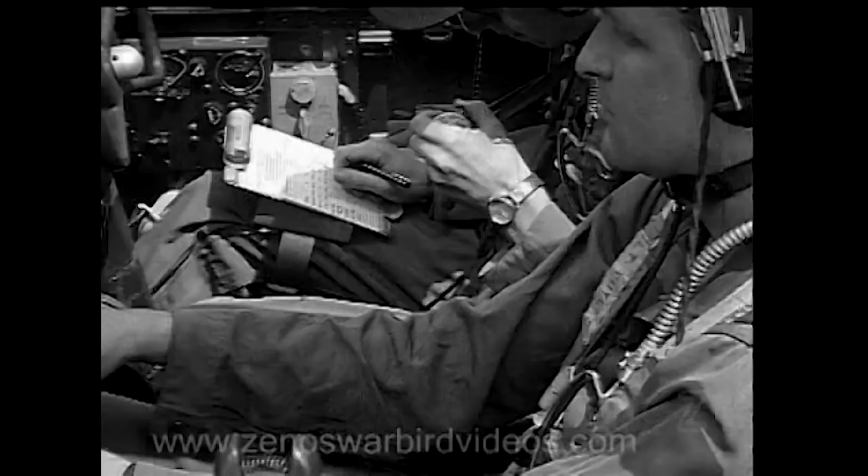In larger aircraft, someone who can help him find the answers will fly along with him. He may be a pilot, returned from several hundred hours in combat, or he may be a flight test engineer who requires the test pilot's cooperation and judgment. In developing aids to flying, no one has brought forth a pilot with an extra pair of hands, which accounts for the need of a second man during a complicated test procedure.

Flight testing means thoroughness, more often thoroughness at its dullest, thoroughness that takes hours of precision flying. The many dull hours spent in sweating out tests are partly compensated for by the variety of tests and the many types of airplanes to be flown.

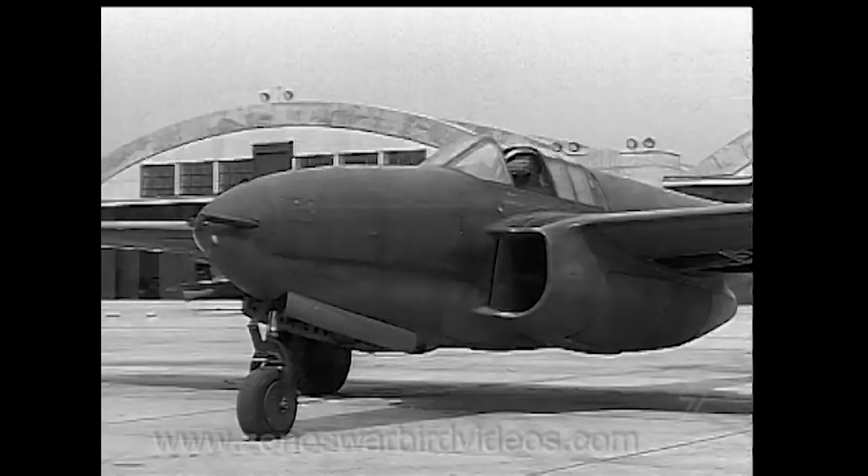Down in this southwest corner of Ohio is located without a doubt the most unusual air center in the world, Wright Field. Here he will find the widest and oddest assortment of aircraft ever assembled on one airfield. A pilot's flying time in one or two types of aircraft is of little consequence here, for he becomes a real asset to the flight test section only after he has become familiar with all types.

The judgment of a top-ranking test pilot often becomes the basis for important decisions in development, modification, and production. Many top names in the industry today were associated with earlier flight tests that helped make America the world's top-ranking air power.

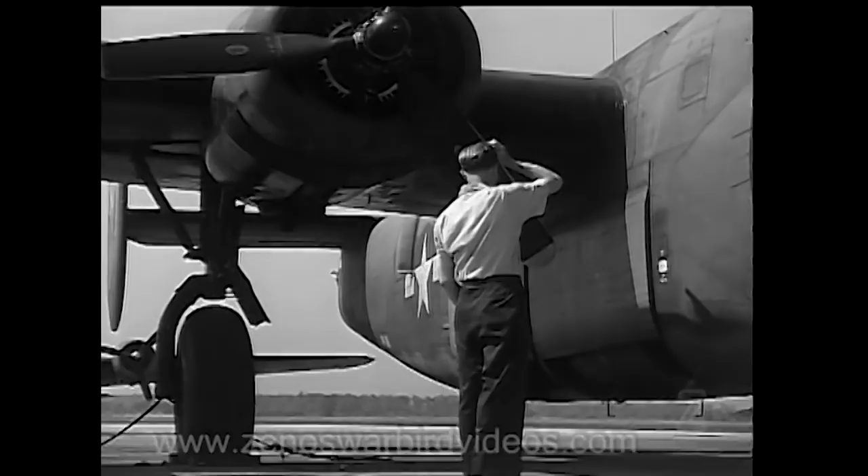The flight testing of modified aircraft, too, ranging from the odd combination of a B-17 nose applied to a B-24, to a lopsided cockpit added to a P-38, is all in a day's work for the flight test pilot. Whether it's the largest of bombers or the smallest of experimental fighters, each airplane must be flight tested, all of which emphasizes the important role the flight test pilot plays in the development and acceptance of aircraft and equipment by the Air Forces.

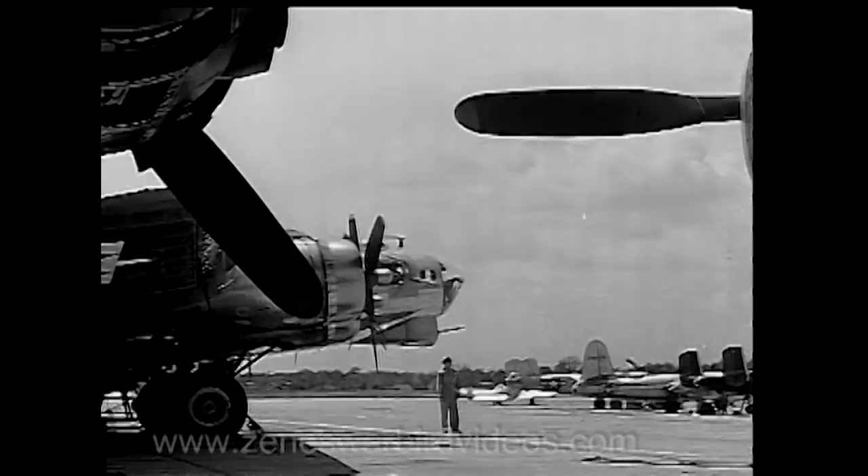Such an enviable rating may seem a remote possibility to a lieutenant fresh out of flying school and about to take off on a flight test training course. To illustrate the various steps he must take, this chart outlines his progress from the start.

His initial classification will normally be that of functional pilot. Assigned to the less involved tests, he will become acquainted with many types of airplanes, developments, and modifications. If he can stick this out, he will advance to the training bracket. The limited flight test grade widens his experience in many types of airplanes, during which he will learn how to sweat out his tests.

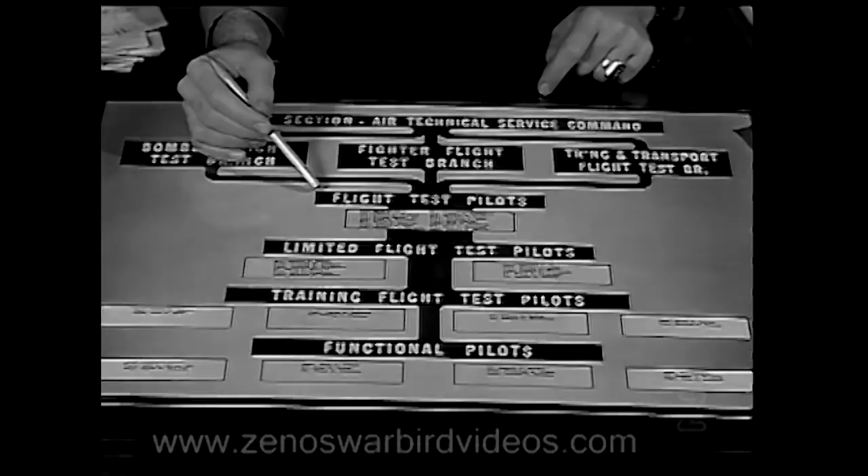His chances are somewhat less, of course, in becoming one of this group of test pilots, whose judgments and decisions are so important in any one or all of the branches, bomber, fighter, or training and transport, under the flight section of Air Technical Service Command.

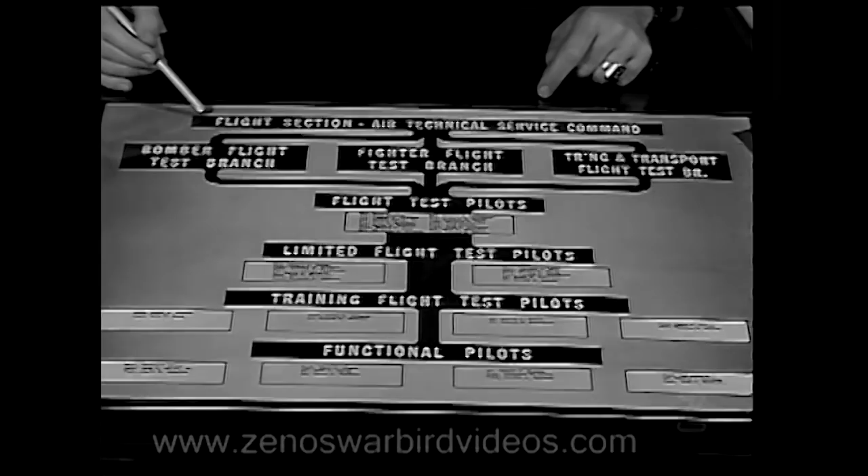Much of the flight testing is conducted upon recommendation from theaters of operations. Tests that have to do with modifications or development are requested by Air Technical Service Command Headquarters. However, the majority of tests are requested by production engineering, the technical staff of Engineering Division, and the many Wright Field laboratories.

Aside from performance or flight tests, there are many incidental tests. For instance, any factory or laboratory data on piston rings, after having been run in on a block test, cannot include the variables that will show up under flying conditions.

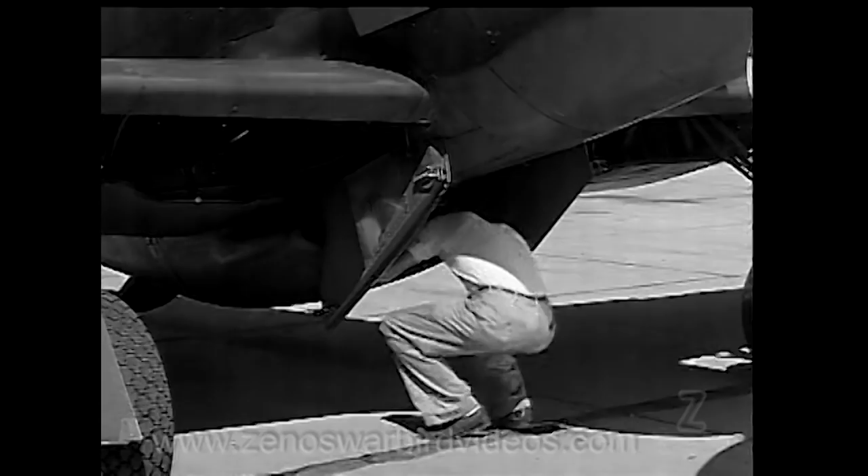The result of high temperature or wear from sand and dust do show up when flight tests are made here or at some desert air base. And again, when the size of an oil radiator is found to cause considerable drag, hot oil tests are conducted. These will determine if the size of the radiator can be reduced to increase airspeed without causing engine failure or reducing engine efficiency. Developments on landing gears require landing and taxi tests to find out their effectiveness in snow, sand, and mud.

Such tests are usually jobs for the unseasoned pilot. But when he has shown that he can take long hours, seven days a week, and an intense interest in his assignments, he will be advanced according to his abilities. When considered competent, he will then be assigned to an aircraft to get performance data.

Prior to all tests, a flight test engineer contacts the source of the request personally and determines in detail the specific information desired. It is he who checks the assignment of the airplane to be flown and sees to it that it is properly loaded and equipped for the test.

Now our flight test pilot comes into the picture. He and the engineer become a Ways and Means Committee to determine the best procedure for the test. Of these ways and means, the type and weight of the airplane is considered, the fuel capacity, type of instrumentation, and the pilot's endurance. Several data cards will be needed, one for each test.

On each card is outlined the flight test procedure for that particular kind of flight test. Records of each test are to be entered by the flight test pilot on his data card clipped to a holder on his knee. The use of a stopwatch computes his timing.

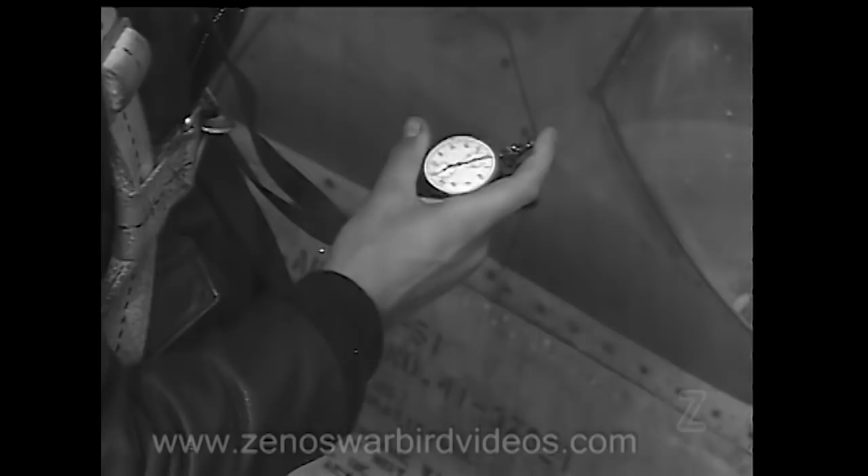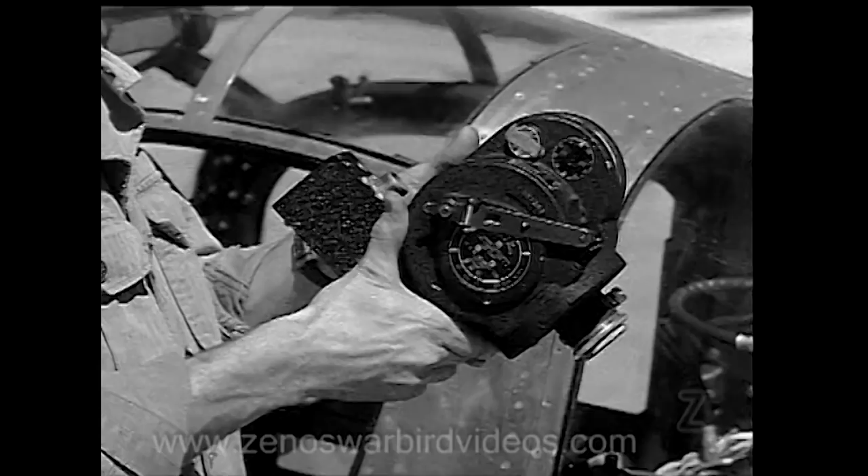Then, to obviate the chance of human error during some tests, two devices automatically record other desired readings. The barograph, which from takeoff to landing traces a record on its blackened paper cylinder, and a fixed movie camera driven by a spring motor. This is focused on an auxiliary instrument panel and will photograph steadily or intermittently the readings of the instruments during the test period. The test records of these two devices are used singly or compared with each other and the pilot's data card.

Since the answers to all tests are based on a correct airspeed calibration and altimeter check, this becomes the first of all tests. Having obtained from the flight test laboratory a barograph, stopwatch, and camera if a photographic record is to be made, the procedure is now up to the pilot, providing the weather conditions are favorable.

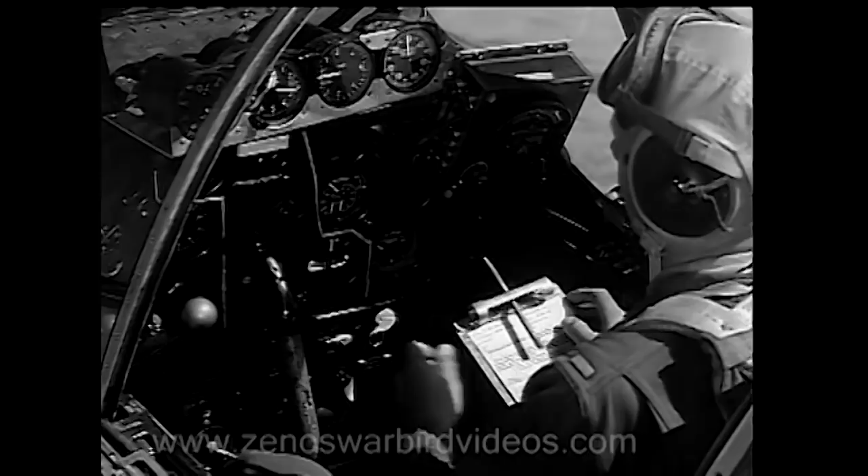In this case, low wind and smooth air at low altitude, since several runs are to be made over a speed course. Before takeoff, the altimeter is set at 29.92. The altimeter reading and free air temperature are then noted on the data card.

When the speed course is reached, it is traversed at the approved low altitude and slow speed. This is done in order to make another check on the altimeter and temperature in this locality. Remember, these readings are always taken before takeoff, before and after the actual calibration, and again after landing back at Wright Field, because it is these figures that enable the flight test engineer to compute the airspeed installation error.

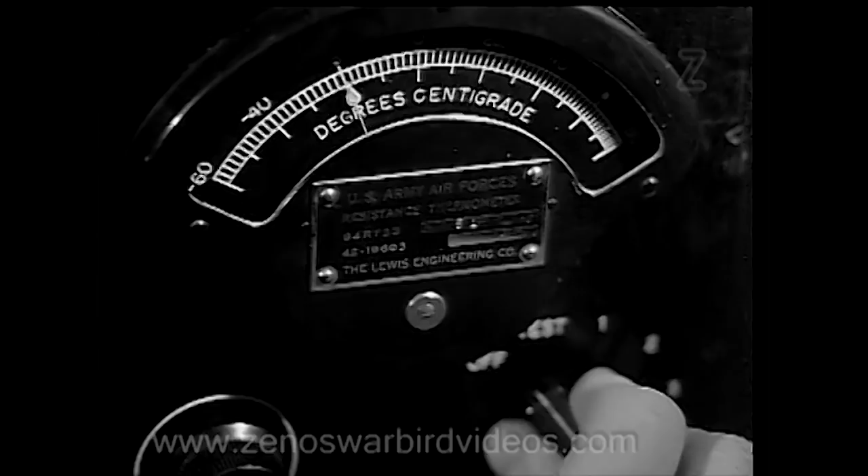The effect of a crosswind must now be considered. An effective run can only be made by disregarding drift and flying the airplane on the compass heading of the speed course. Now for the first half of the first calibration run.

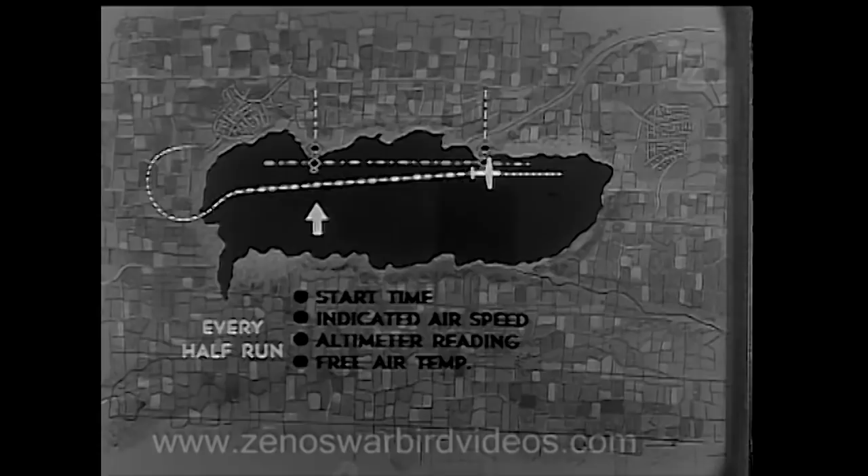Having gone back far enough to attain maximum speed well before reaching the marked course, the stopwatch is started opposite the first set of markers. The indicated airspeed, the altimeter, and free air temperature are noted, and the watch stopped in passing the last markers. All this information is now entered on the data card.

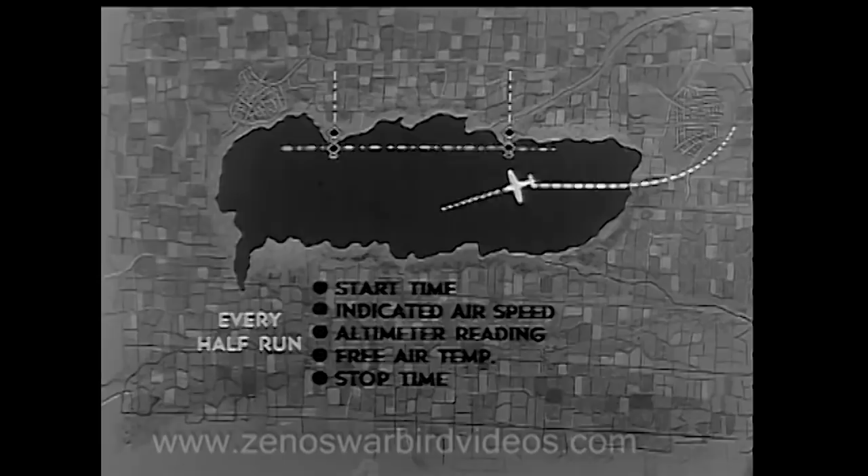Returning for the last half of this first run at the same speed, the same procedure of clocking, reading, and entering is repeated. Other complete runs at lower speeds are made and the recording procedure repeated, not overlooking that final altimeter and temperature check at the speed course, and again before you step down from your airplane on the ramp at Wright Field. Remembering that you've been out for an hour and a quarter, there's probably a change in both barometric pressure and temperature. Obviously, there has been a change, and now the flight test engineer can compute to his heart's content.

An alternative procedure in obtaining airspeed calibration is frequently used in which another airplane is employed instead of a speed course. This additional aircraft is kept up to accurate calibration and functions as a pacer airplane during the test. The various check intervals are signaled visually from one pilot to the other.

In this procedure, the altimeter checks at various speeds are made by buzzing the tower both before and after the test. This is not the fun it seems to be. It's a job of precision flying.

Then someday, when the weather is just right, you'll be running a critical altitude flight test. In other words, finding the highest altitude at which rated power can be obtained on this airplane and recording the necessary data.

You will recall your session with the flight test engineer when together you decided that for this test you would make 5 level flight runs at altitudes that would produce the needed data. Functional settings during the run must include the prop at 3,000, mixture auto-rich, throttle wide open, flaps completely closed, and landing gear up, not overlooking the necessity of setting your altimeter at 2992 before takeoff.

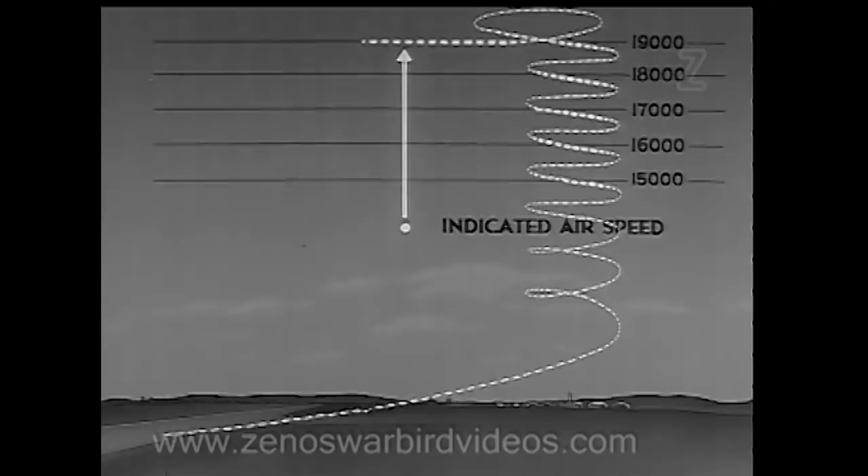That precise condition will not be arrived at, however, until you've learned the meaning of sweating it out. That's what you came up here for, to hold her until you could get accurate readings for the flight test engineer: indicated airspeed, manifold pressure, carburetor air temp, oil temp, and cylinder head or coolant temp.

With these few little details entered on the data card, you can drop down to 18,000 and do it all over again. Then down to the other levels specified on your data card, at each level repeating the same procedure of reading and entering.

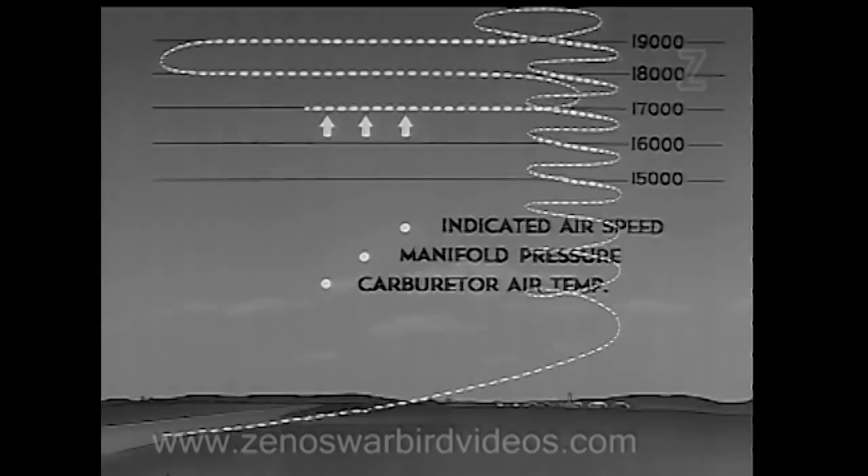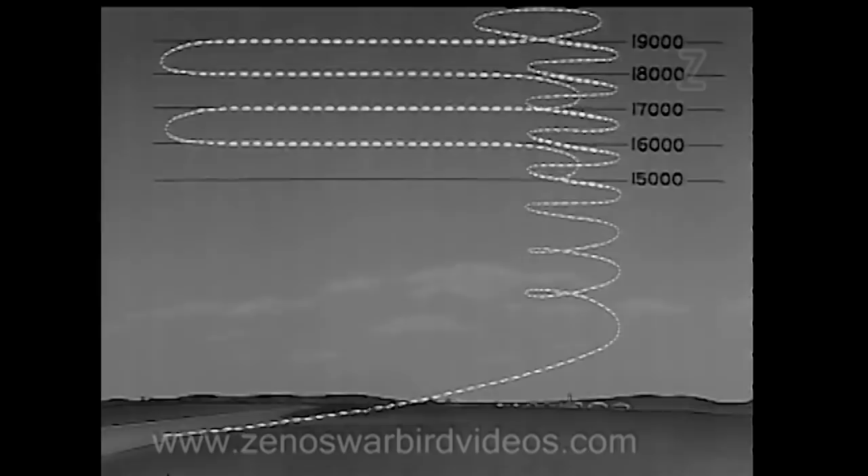Maybe not quite as fast as the action of this graph, for the actual test flight takes about an hour and a half of precision flying.

With this test completed, maybe you can call it a day if your data card is complete with the date, time of test, and your somewhat shaky signature.

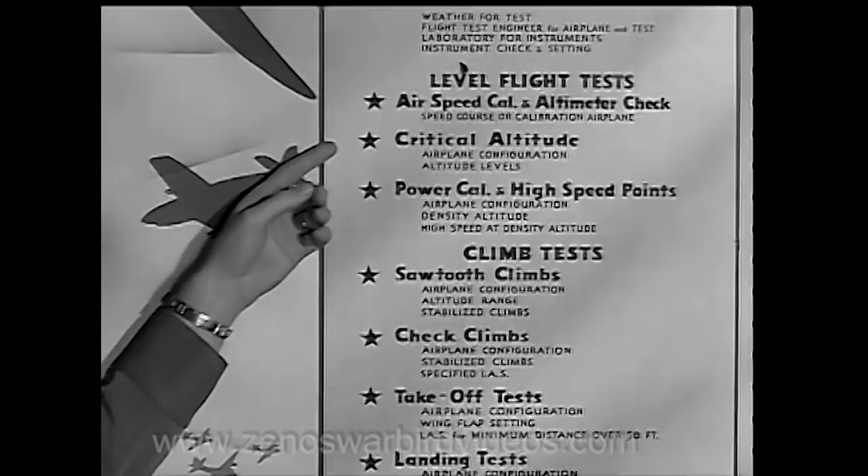After the flight test engineer has computed your data to determine the critical altitude, we come to the test for power calibration and high speed points, or to find the best airspeed for various engine settings.

Since the desired altitude is unknown and varies from day to day, a density altitude table is used to find the altitude at which this test is to be run. Again, the altimeter is set before takeoff, 2992.

Then a search for the altitude where your air temp and altimeter readings agree with the matching combination shown on the density altitude table. When this altitude is found, again as in the previous test, the prop setting must be at 3,000, mixture auto-rich, throttle wide, cowl flaps closed, wing flaps and landing gear up, and the run proceeds exactly as in the critical altitude test.

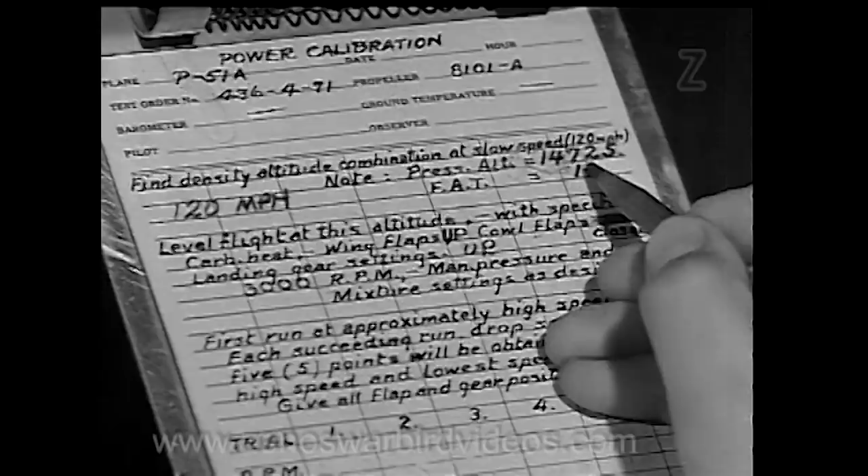A short pull-up identifies the end of each run on the barograph record. The second run is made with procedure unchanged, except that the throttle is pulled back to a point that will reduce the manifold pressure 2 inches.

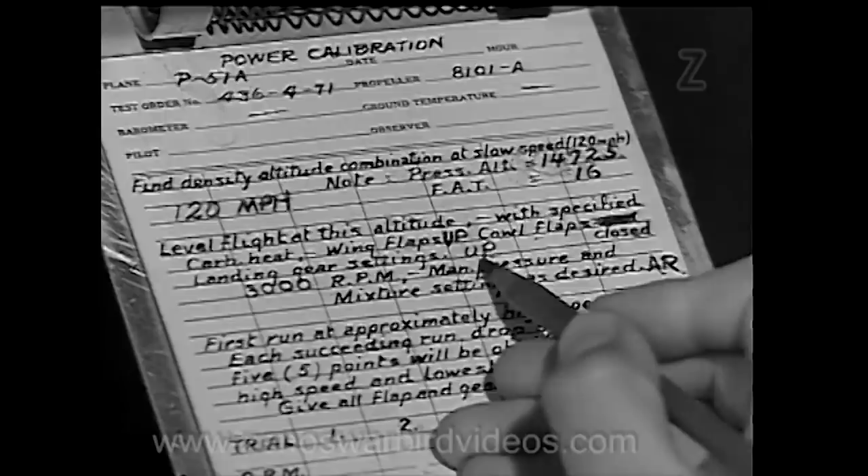For each succeeding run, the throttle is pulled back for an additional 2-inch reduction of the manifold pressure, and entries are made of these important readings on the data card. All runs completed, we now have the necessary high speed points in relation to manifold pressures.

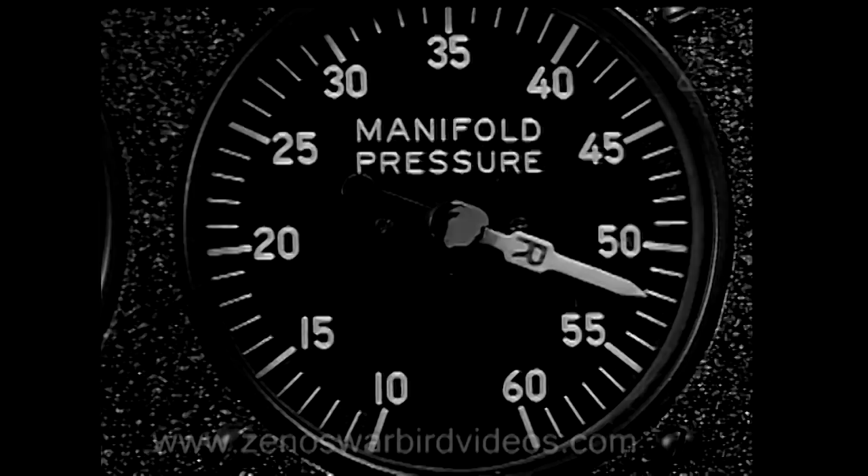This data is then reduced by the flight test engineer to a curve, representing the variation of speed with power at the critical altitude. Consequently, with the rated power of the engine at critical altitude, the curve shows us the maximum speed of the airplane.

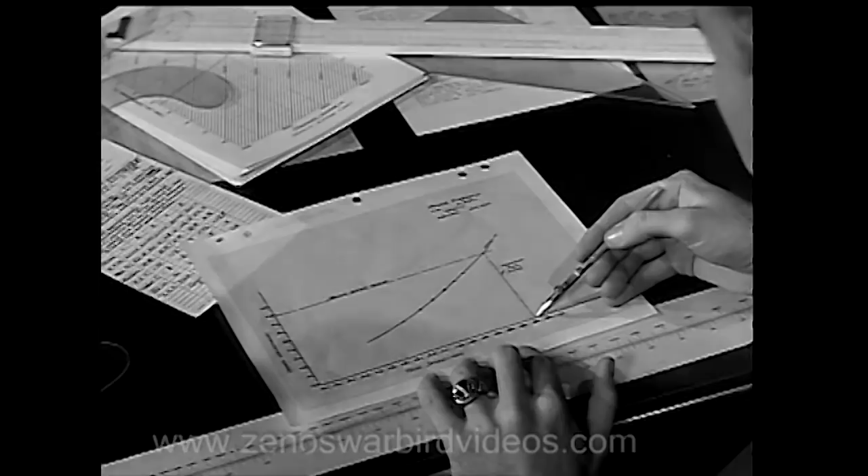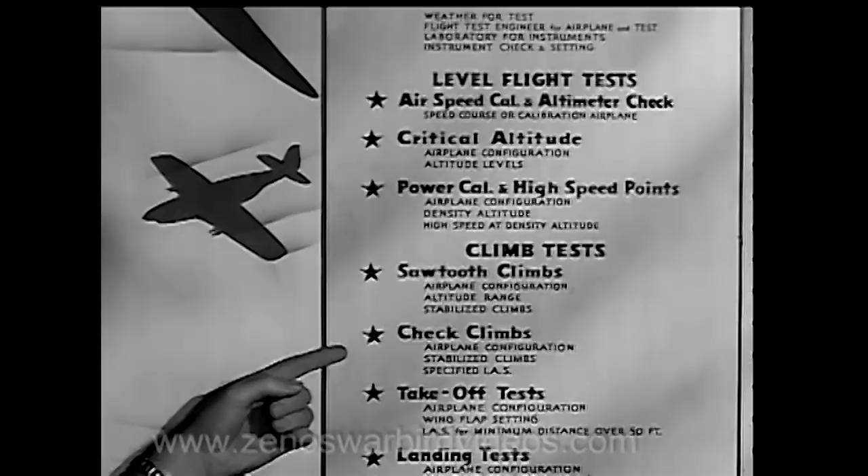Now that we have covered the test procedures for all level flight performance, here are the tests to ascertain the most efficient climbing speeds and the best rate of climb.

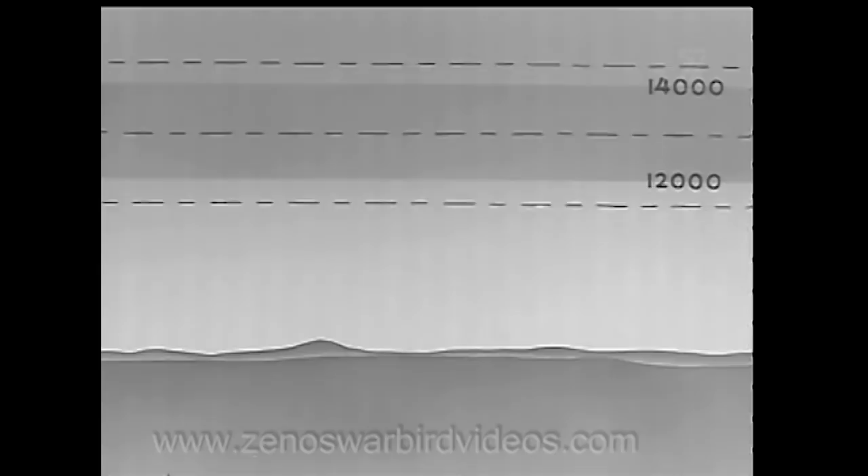In order to determine the indicated airspeed for maximum rate of climb, a series of short climbs are made through an altitude range agreed upon by you and the flight test engineer.

In this test, the barograph for the first time becomes a primary instrument. The stopwatch is again used. And as in all test procedures, the altimeter setting is important. Again, a check is made as before, from prop setting to landing gear.

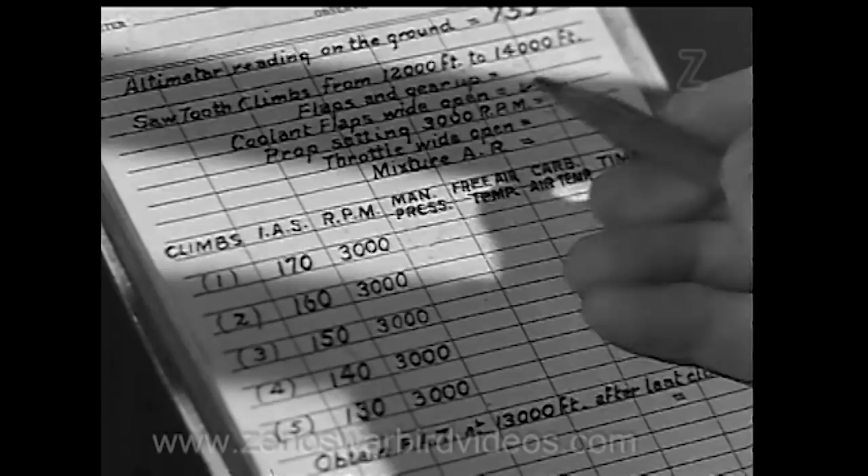In this test, the coolant flaps and oil shutters are set wide open. Care must be taken in flying this test to make certain the airplane is in a steady climb at the indicated airspeed specified on the data card before the desired lower altitude is reached.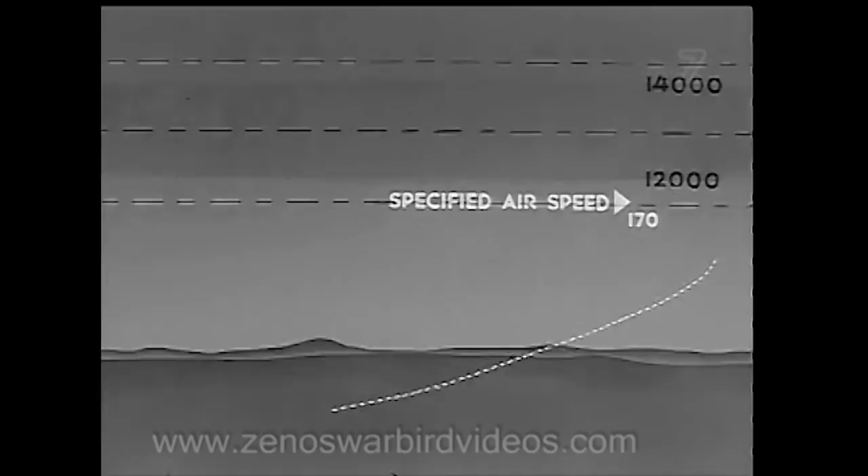This specified airspeed must be maintained to a point at least 500 feet below the predetermined altitude range. Upon reaching the range, the stopwatch is started. Midway, the manifold pressure and carburetor temp are noted and entered on the data card. When the top altitude is reached, the watch is stopped.

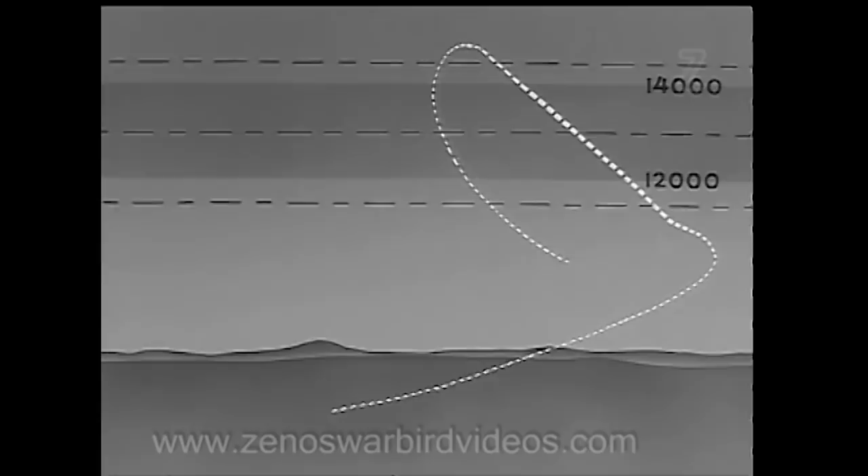Then the time is entered on the data card and the watch is reset at zero. After continuing the climb to 500 feet above, you can then drop down below the bottom of the range far enough to again reach a steady climb before re-entering the testing altitudes.

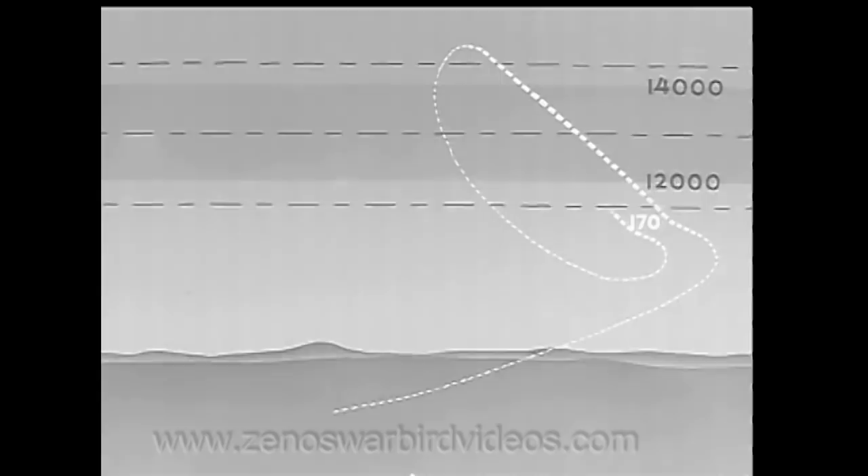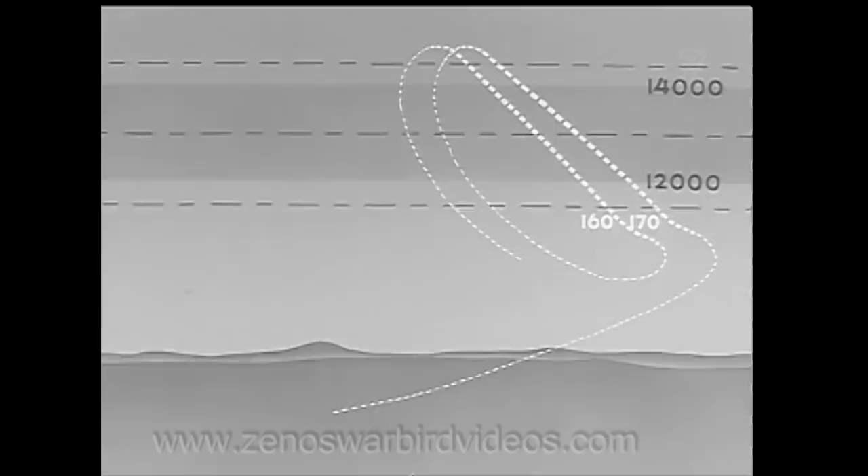If the air has not been perfectly smooth during this first climb, the test should be discontinued. But assuming it was smooth, the second climb is made, holding steadily to the next indicated airspeed on the card, and the readings entered as in the first run. These sawtooth climbs are continued until all the indicated airspeeds for the test have been covered.

On any one of your descents, when midway of the range, a free air temp reading should be taken at slow speed. Your card will now have all the desired data, and you will also have a barograph record of every climb.

When this record has been calibrated in the flight test laboratory, your engineer checks it against the readings you entered on your data card. Since the most efficient climbing speed varies with the altitude at which the test was run, other similar tests are made at various altitudes in order to find the best climbing speed at any altitude.

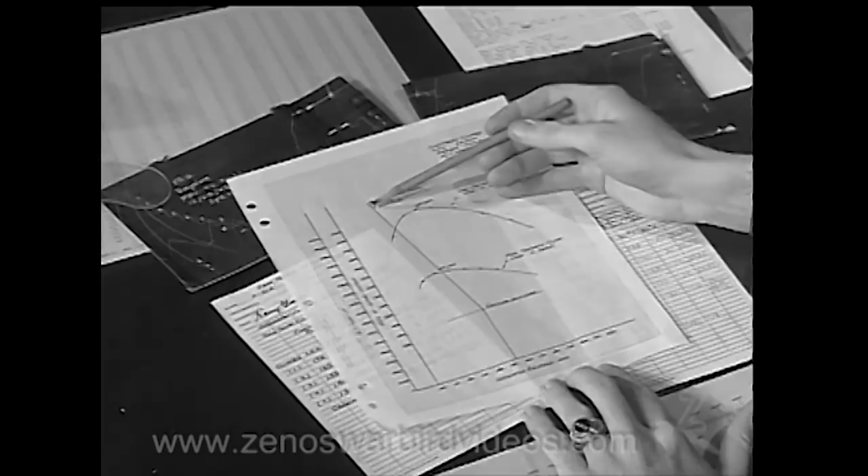Once these speeds are determined, we can proceed to the next test, the check climb. There are several ways of finding rate of climb and time required in climbing, but a continuous climb to as high as the airplane will go will get the best answers within a reasonable amount of flying time.

Before starting this test, if clouds are noted at 10,000 feet, better postpone it, for smooth air is essential. Assuming that it looks favorable, let's make a try for it.

After the flight test engineer has specified on this data card the best indicated airspeeds resulting from the previous sawtooth climbs, the pilot needs for this test, along with the barograph, a different type of stopwatch. Having two hands, it measures two time periods.

Once the barograph is caged and started, the altimeter is set at 2992. Again, as in the sawtooth climb, all the specified settings from prop at 3000 to landing gear up are checked.

Then, slowing the airplane down to the specified airspeed at as low an altitude as possible, the throttle is advanced to the proper setting specified on the card, and the airplane is pulled up into a climb, keeping the airspeed constant.

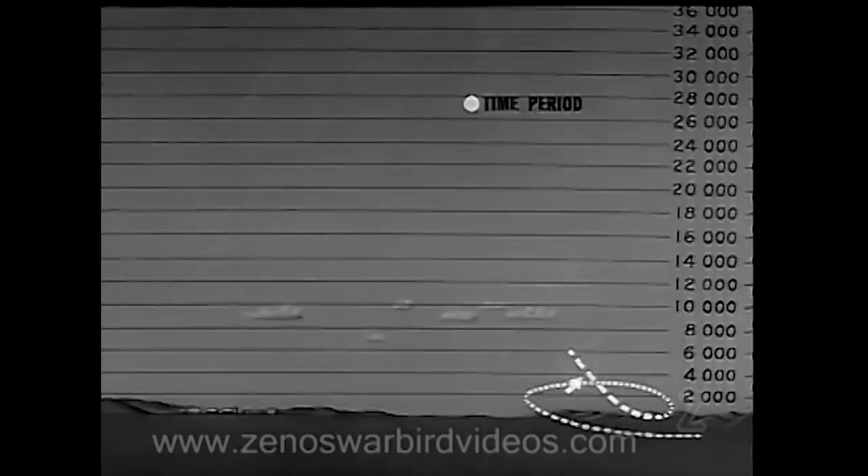From here on, the airspeeds must check exactly with those speeds called for on the card. The split-hand stopwatch is started at the first even altitude after stabilized climb is attained. At this altitude, readings are taken of the manifold pressure, cooling flap position, and carburetor air temp.

At the next even altitude, one hand of the watch is stopped. The time is noted along with the manifold pressure and other necessary readings as before. The stopped hand of the watch is then brought up to the moving hand.

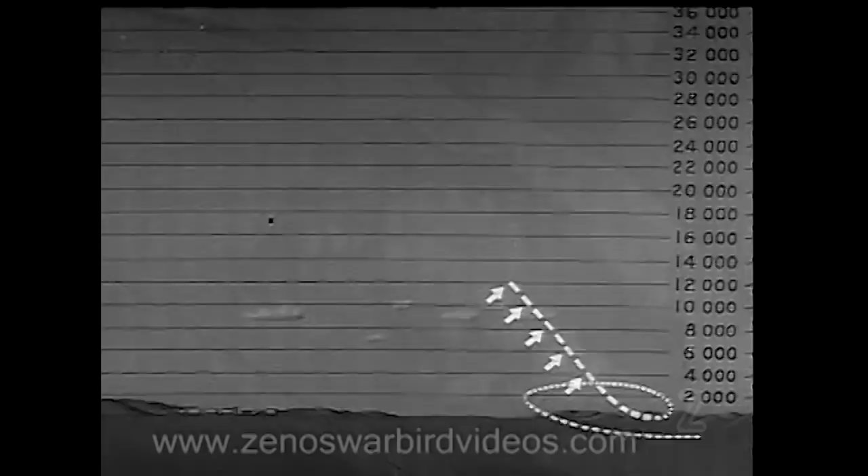This procedure is repeated at every even altitude, all the way to the top of the climb. The top is reached only when the rate of climb drops below 100 feet per minute.

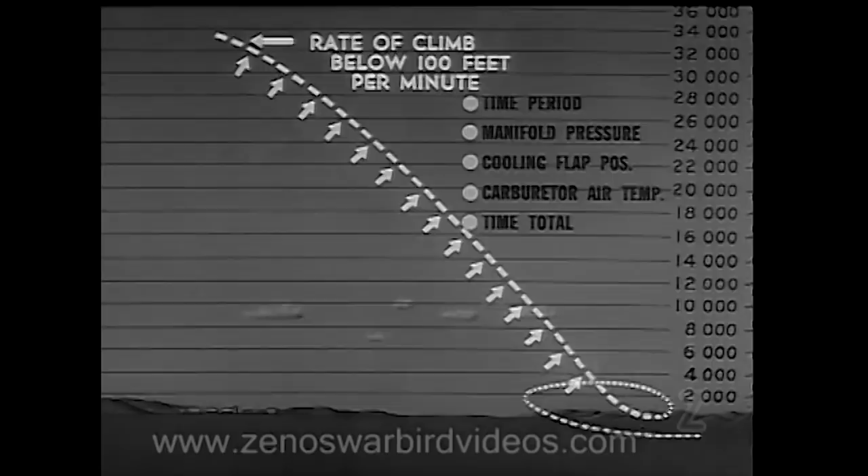The entries on your data card now show the test completed, except for the free air temp readings at slow speed. These are made at the even altitudes on your way down, taking readings at each altitude at which you took readings during the climb.

Because of a probable weather variation at the testing altitudes, and the chance of human error in procedure and readings under such circumstances, the whole thing has to be done all over again.

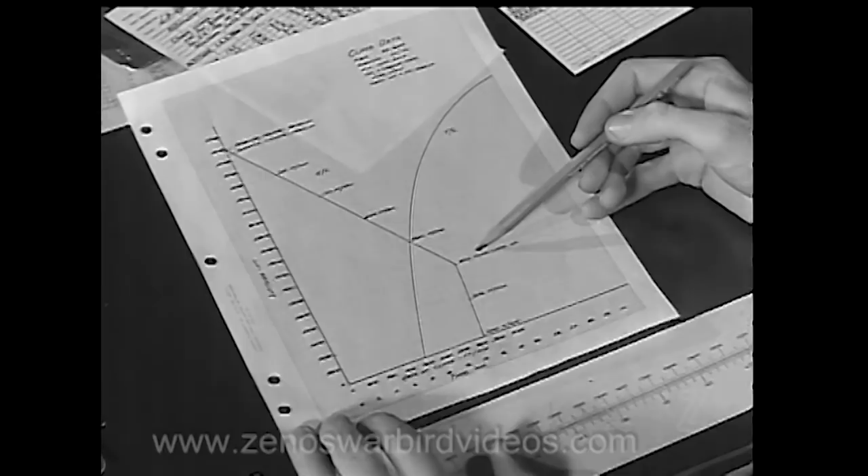After the second test run is made, and not until then, can these barograph tracings, combined with the information on both data cards, form a basis from which the engineer can determine four things: the maximum rate of climb, the minimum time required to climb to any altitude, the service ceiling, and the absolute ceiling of this particular airplane.

This covers all level flight and climb tests. These flight tests thus far have found the best climbing speed, the ceiling, the critical altitude, and the top speed of an aircraft. The next and last are the takeoff and landing runs, the most advanced of all flight tests.

Owing to the nearness to stalling speed at low altitude, they are also the most dangerous. Good visibility is needed, and the wind must be less than 10 miles per hour.

No extra instruments are taken along, for a camera crew on the ground will take a motion picture film record of your takeoffs. They will have noted the wind velocity and direction, barometric pressure, and free air temperature. These and the film will enable the flight test engineer to compute your ground roll, ground speed, and after leaving the runway, your earliest clearance over a possible obstacle.

At least 30 minutes before the test is to be run, you will have informed the flight test laboratory. This will allow the camera crew sufficient time to set up their equipment.

Their camera must be positioned over a fixed marker located in the center of the field, several hundred yards from the runway you are going to use.

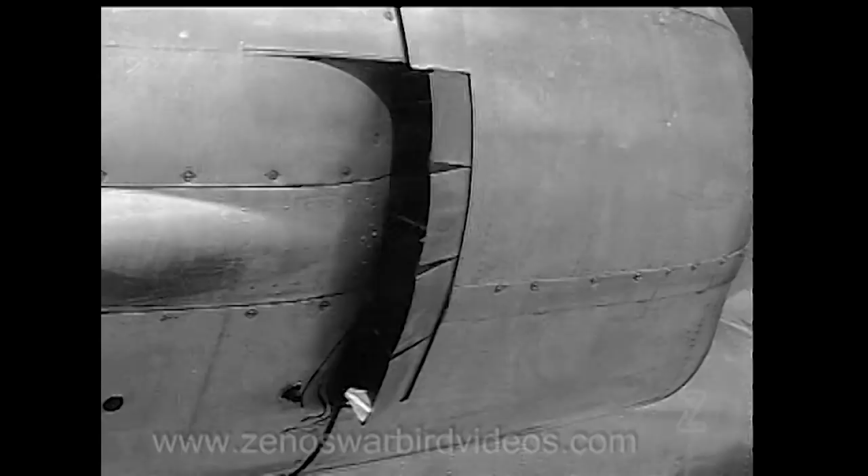Once on the taxi strip, the pilot waits for signals from the camera crew. The brakes should be locked and the altimeter set at 2992. The free air temperature is noted and entered on the data card.

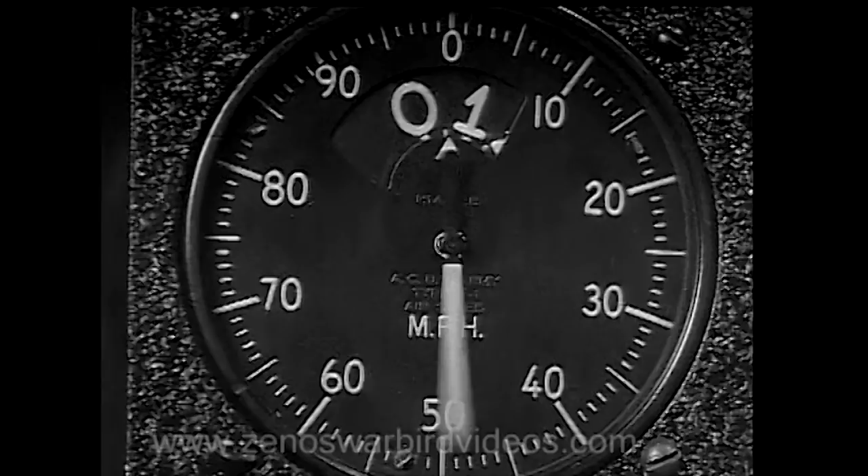The cowl flaps must be set, and the data card specifies their proper position. The wing flaps on the B-26 are in best takeoff position when set at 30 degrees. This setting has been arrived at from previous performance takeoffs. Such settings on other airplanes may range from 0 to full down. Also, from previous tests, the pilot remembers that at this gross weight of 31,000 pounds, the B-26's best indicated airspeed for takeoff is 104, and that 115 is the best airspeed to clear an imaginary obstacle in the shortest possible distance.

Even two memory experts couldn't remember all the readings for this test in the time it takes to make one run. By that we mean the RPM, manifold pressure, indicated airspeed, and carburetor temperature as a group of 4 figures at 3 separate points of the test.

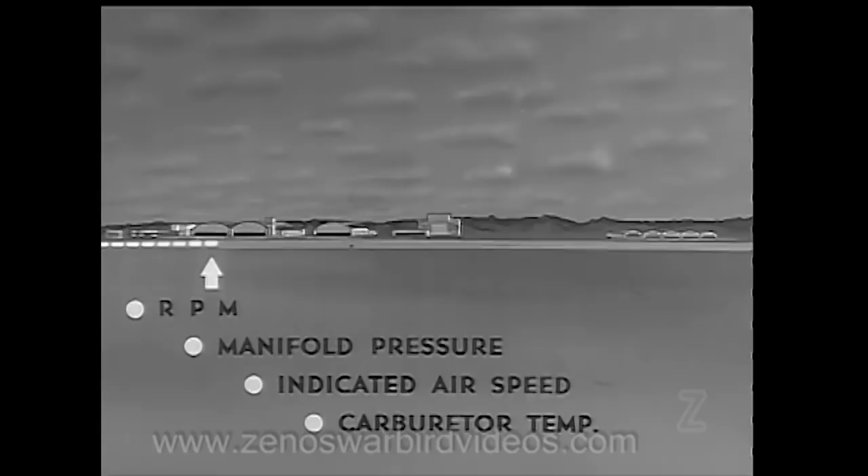So at least 6 runs will have to be made: 2 runs to concentrate on the 4 readings when the brakes are released, 2 more runs to note these correlated figures when the wheels clear the ground, and the last couple of runs to get the 4 readings at the moment you reach 50 feet above the runway.

Camera records of 3 of these runs will be selected by the engineer to determine the shortest run necessary to clear a 50-foot obstruction.

Your signals from the camera crew are transmitted by a light gun, similar to those used in the control tower. These flashes control the procedure throughout the test. When you have lined up the airplane on the runway with brakes firmly applied, you are ready to rev up the engines to the specified power and release the brakes. If they do not hold until this specified power is reached, the power will have to be brought up as quickly as possible after releasing the brakes.

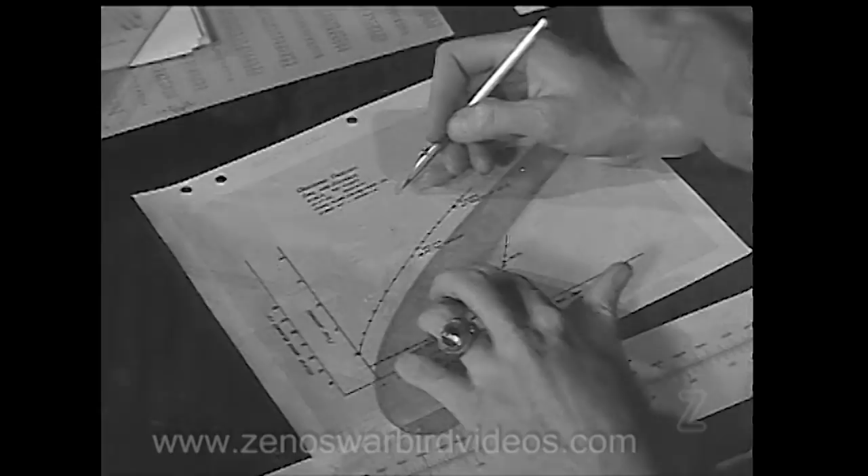The film records, after being analyzed in the viewer, permit the engineer to average a curve showing the best takeoff performance. A simple test, isn't it? On paper.

The approved landing tests are made with the same photo recording equipment and under the same weather conditions. When the cameraman is ready, the pilot circling the field will get the green light and line up for a landing.

Coming in, when he is 50 feet above the runway, he must quickly note both the indicated airspeed and the RPM. His minimum airspeed should be such that a slight flare will result before his wheels touch.

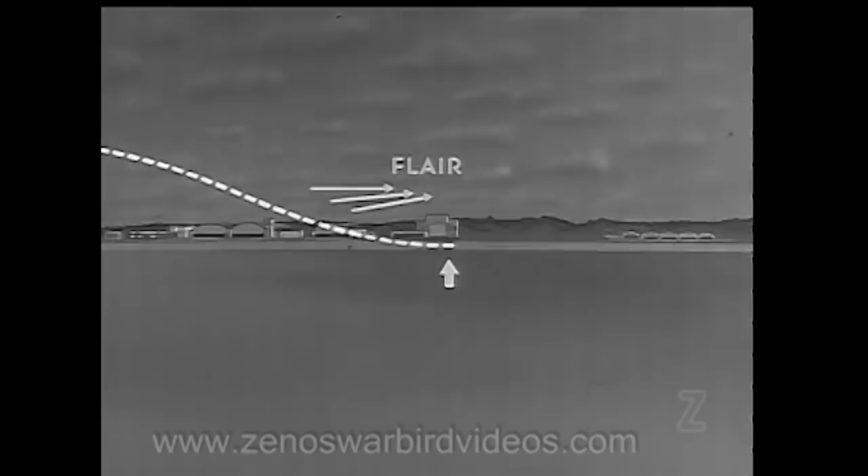The instant they contact the runway, indicated airspeed and RPM are again noted. Then the brakes will be applied as hard as possible without lifting the tail too high and damaging the prop. To the camera crew, a good landing looks like this.

After coming to a full stop, he will have time to write down the instrument reading when at 50 feet up and when he landed. Then he takes off and does it all over again 5 or 6 more times.

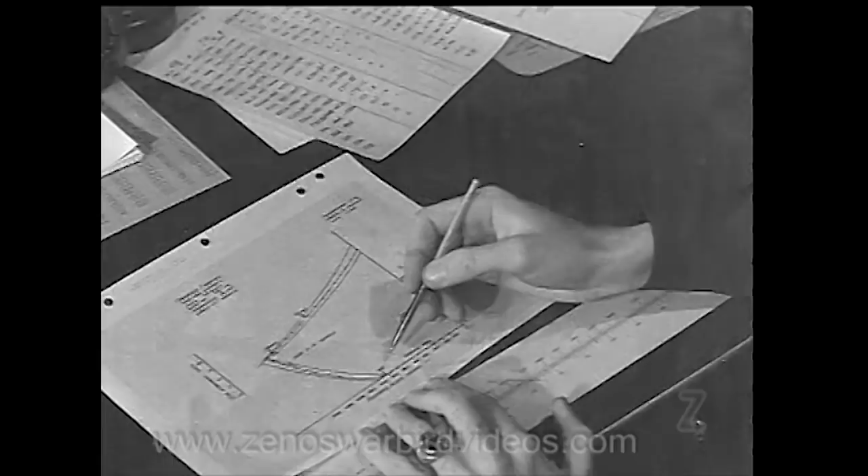In the flight test engineering office, the film records will be translated to a curve showing the minimum distance this airplane needs to land after clearing a 50-foot obstacle. This information is used only by engineers for comparison with other airplane performance. Therefore, it is not recommended for use by the pilot either in training or combat.

In testing the handling characteristics of any airplane, such assignments as stability, dive, spin, and aerobatics tests are entrusted to only the most experienced of flight test pilots. More often, it is up to him to judge the results rather than the engineer.

You can expect no thrilling exploits, no heroics, no public acclaim. Aside from work well checked by the crew chief, the weatherman, and communications, your life will often depend on your own reactions in an emergency.

All flight tests conducted at Wright Field are based on many years of research and the experiences of men having the most comprehensive range of facilities in the world.

Someday, when you have mastered the flying characteristics of many types of aircraft, have learned to cooperate with the flight test engineers, to render intelligent suggestions and decisions on design, function, and production, then you may be accepted as one of this group of specialists at Wright Field, known and respected as flight test pilots.